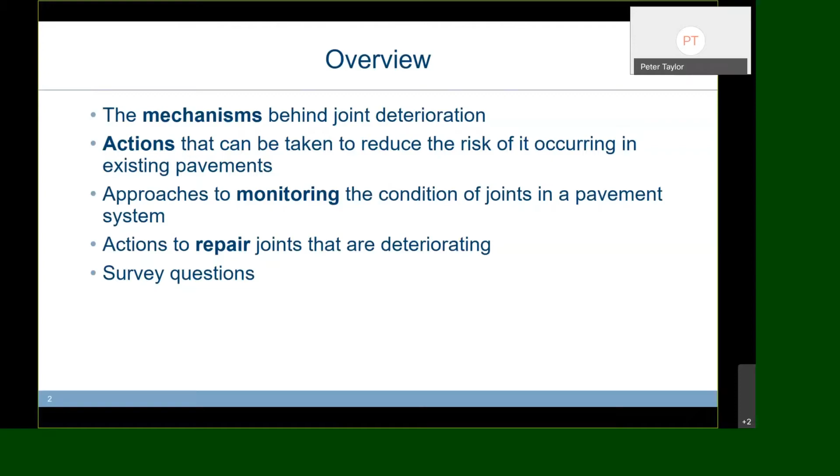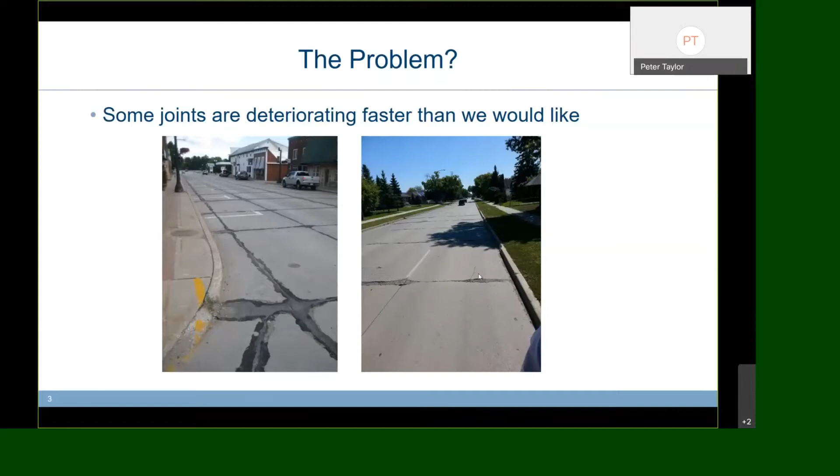So what are we talking about? Joint deterioration. These two photographs are very typical. It doesn't happen everywhere, but particularly in small towns where the whole town looks like this, city engineers tend to get a little bit grumpy. The center of the slab is beautiful, it's in pristine condition, but the joints themselves are starting to show signs of distress. And depending on how you repair them on the fly, they can start to look pretty ugly pretty quickly. We tend to see it more in local streets, but occasionally we do see it in interstates and expressways, but this is more unusual.

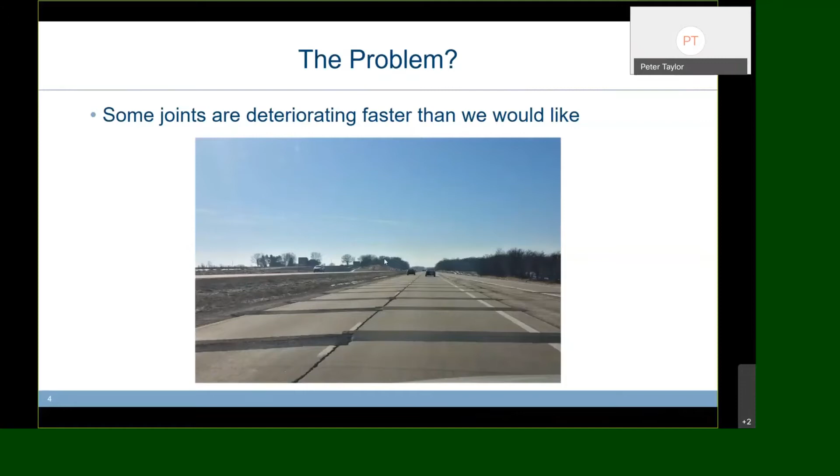How bad does it get? Well, it basically depends how long you leave it. It often starts out as the shadowing here, so a discoloration a few inches away from the saw cut, but if you leave it long enough, you can end up in fairly severe distress. And I'm pretty sure that speed limits in this section of the city are severely lowered. Maybe it's an effective way of doing traffic calming, but I'm not sure that most engineers would agree with that.

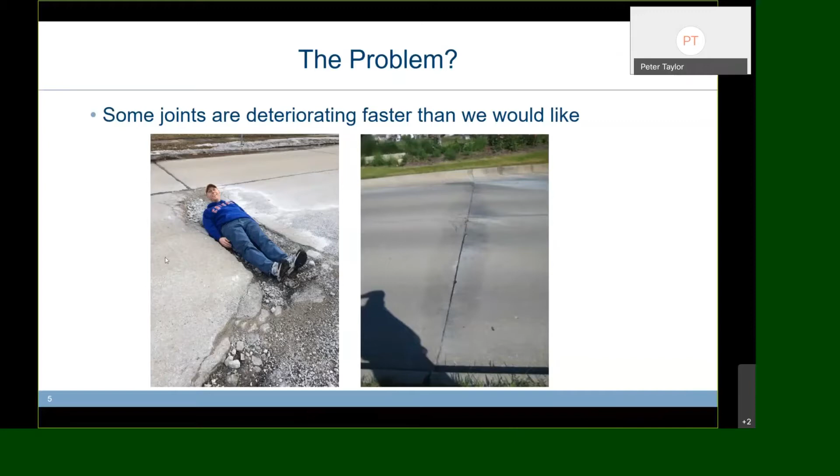It doesn't always look the same. Sometimes it's in the form of raveling. In the photograph on the right here, a crack has formed about 1 inch off the original saw cut, the material's been lost, and it's been repaired. 1 inch away, it's happened again. And in this case, it's happening a third time. You can see a crack starting to form, a third layer of distress. So it's stepping its way out from the original sawn surface. It keeps on going even after you repair it. And that may play into the conversation about how do we repair it, and we'll address that later on.

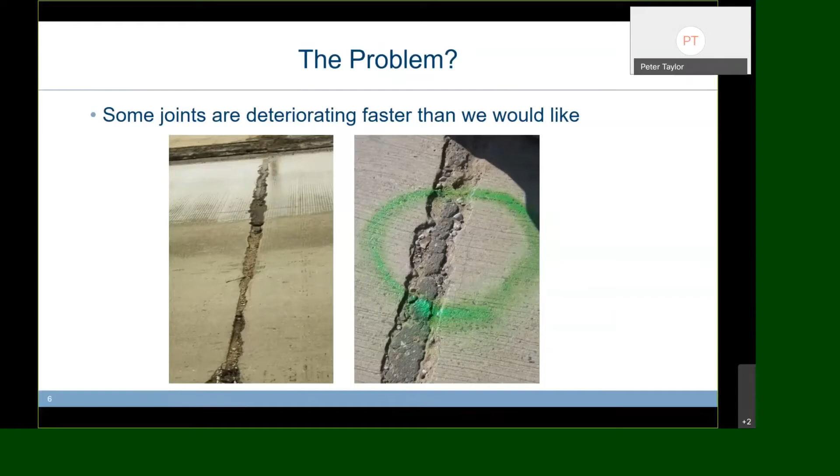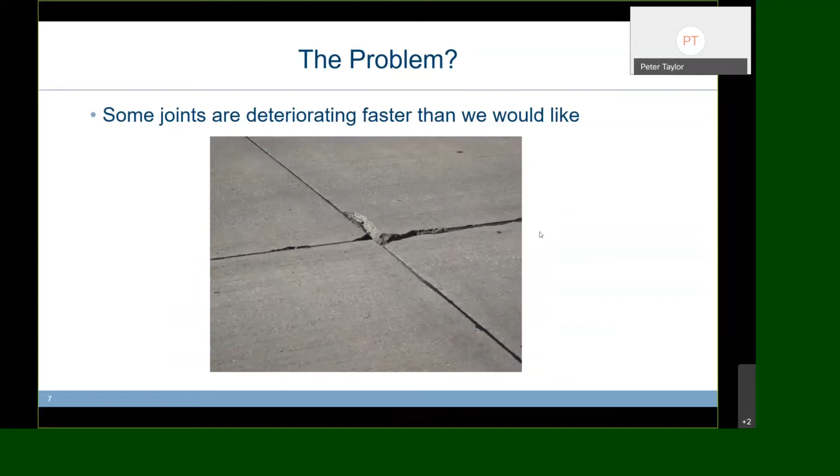One of the more challenging scenarios has been this one, where this is all obviously the same concrete, slip formed all at the same time, and one corner is in real trouble, two corners are showing a little distress, and the fourth corner is sitting there high and dry, proud, happy, no distress whatsoever. And that was always a challenge for us to begin to understand how that sort of thing could happen.

So in summary, the things that we most often see: it's more prevalent in local streets than in mainline slip-form paving. It's not everywhere, but wherever it does happen, it does seem to be pretty significant. And there are frequent examples of it happening here and then not a little further down the road, even the next panel.

Now, the photograph is of a city street in the Midwest. It's about a 2-mile length from where I took this photograph to the end of the road that you can see. The first mile was placed in June. They closed the whole road down and replaced it all. Then when that section was complete, they reopened that to traffic, closed the second mile down, and repeated the exercise. Same contractor, same crew, same materials, same source of concrete, same traffic, same environment.

The section we're standing on is not pretty. The second mile is pristine. Very confusing. Now, the only real difference between these two sections is they were placed about a month apart in time.

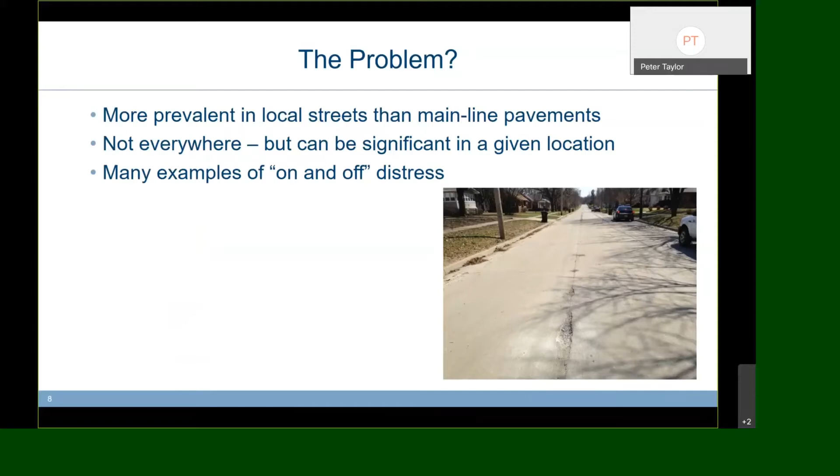We spent a lot of time looking at this. We had a pool fund running. We had some of the biggest and brightest brains working with us, including Larry Sutter and Jason Weiss. Larry and I spent a lot of time traveling all over places where we were trying to pick up clues. We were trying to find locations where it happened and didn't happen so that we could pull cores from them and see if we can observe the differences between them.

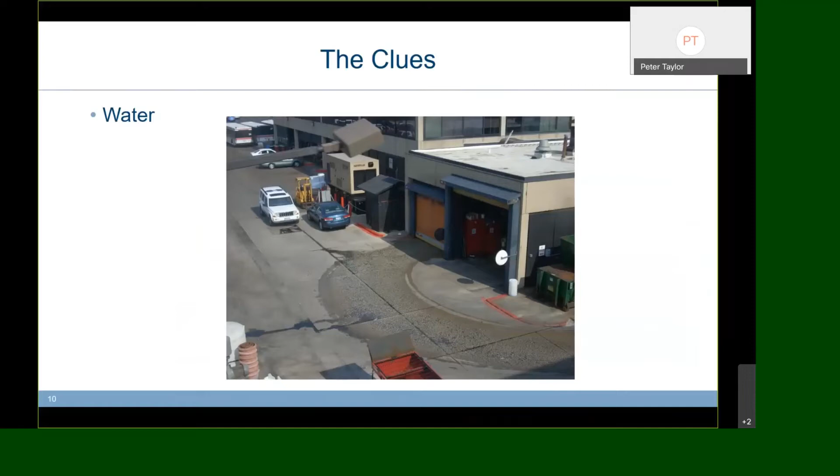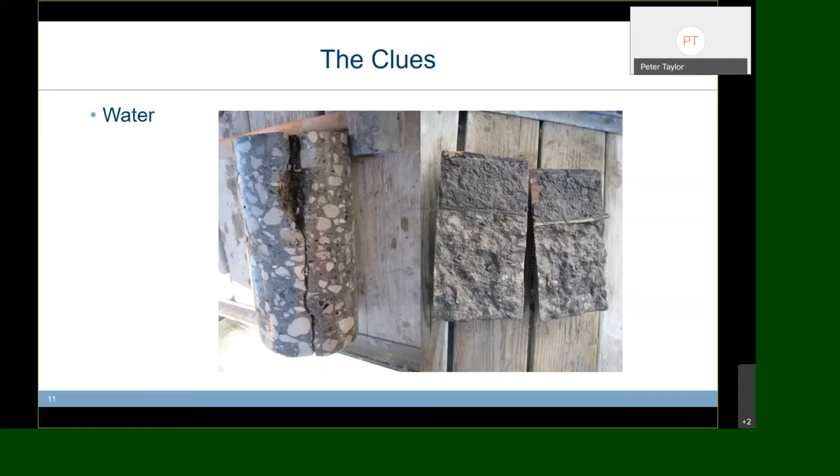And underneath this section, it was clay. So once the water penetrated through the crack, it had nowhere to go because it was saturated. We were at the water table. So the water got trapped in the kerf. And then we got freezing and thawing cycles. We got chemical attack happening inside the kerf here. And you can see the little fingers of damage. It looks like thin flakes, almost like fingernails, layers and layers and layers of them. And that soon became a fairly typical observation.

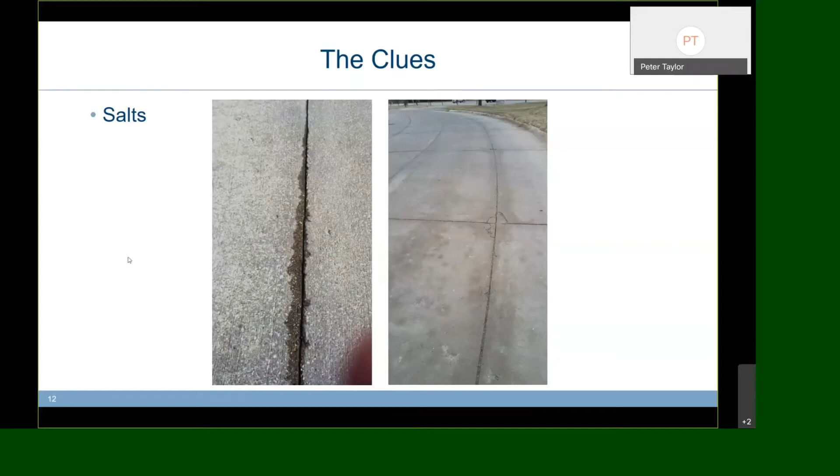In this case, on the photo on the right, this is right outside my office. And again, you can see the center of the slab is really pretty and dry, but around the joints, it's still wet several days after the last snow event. So again, the de-icing salts are holding the water in place, increasing saturation.

The other issue, and this is one I do want to highlight as we move forward, is that typically we were seeing that it happens in pavements that are about 10 years old. And indeed, some older pavements that were really happy all of a sudden started to deteriorate relatively recently. And again, this started to be part of the clues that we used to solve this puzzle.

I'm going to come back to this idea of systems that have been in place for a while, in that I'm still getting questions. People say to me, you did this work years ago, you gave us all these recommendations, and damage is still happening. Why? And often as not, when we do investigate it, it turns out the pavements that are starting to show distress now were built before people started implementing the recommendations that we were making several years ago.

So I guess the point that I really want to make is that there's still a fairly significant amount of concrete pavement out there that may still show signs of distress because it was built before we were able to make rigorous recommendations on how to prevent it. So we can expect this problem to keep showing up for a few more years. And that sort of plays into the discussion we're going to have at the end on how do we fix it when it happens.

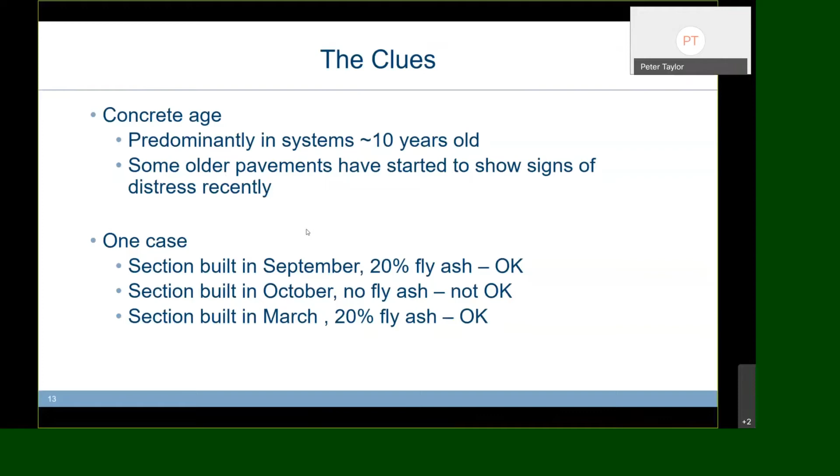In the Iowa case, we think what happened here is that the transverse joints were early entry saws, about 1 inch deep. The longitudinal saw cuts were T/3. So any material or water that got into the transverse joints drained into the longitudinal joint and then got trapped. The crew doing this repair work were telling me that any water that got into the system while they were sawing didn't drain away.

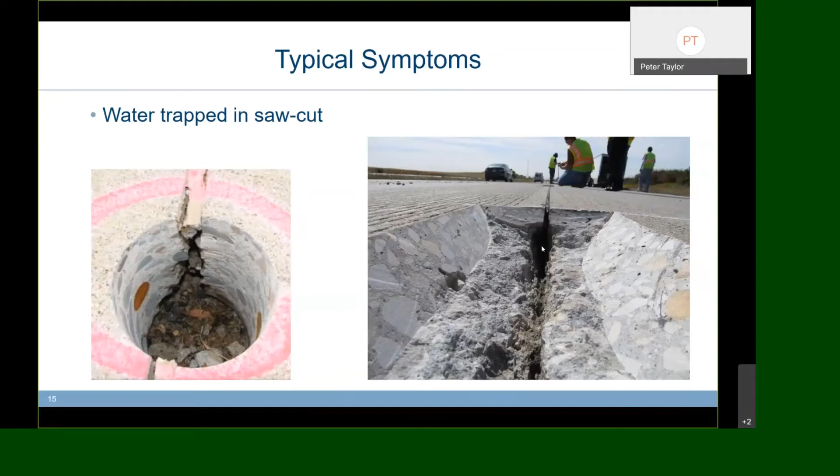These were tight joints. They had tie bars across them. Water couldn't get out, so it was trapped inside here and causing or accelerating the distress.

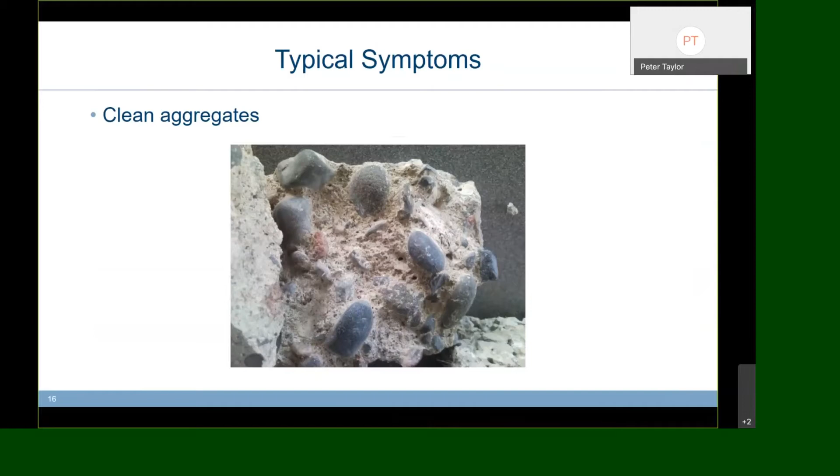And I've seen this in many locations around the Midwest where, if you have enough raveling, what we're seeing is that there's loose pebbles lying around in the troughs where the damage has been happening.

So one face where the blade is not actually impacting it, it's clean and it's dry and there's far less impact. It would be the left-hand side. On the back face where the blade is fighting the concrete on its way out, you're leaving behind the bruising, and that bruising or micro cracking is a place where water can collect, nasty chemicals can stay, and that's where the damage is happening. And that made a lot of sense when this was explained to me.

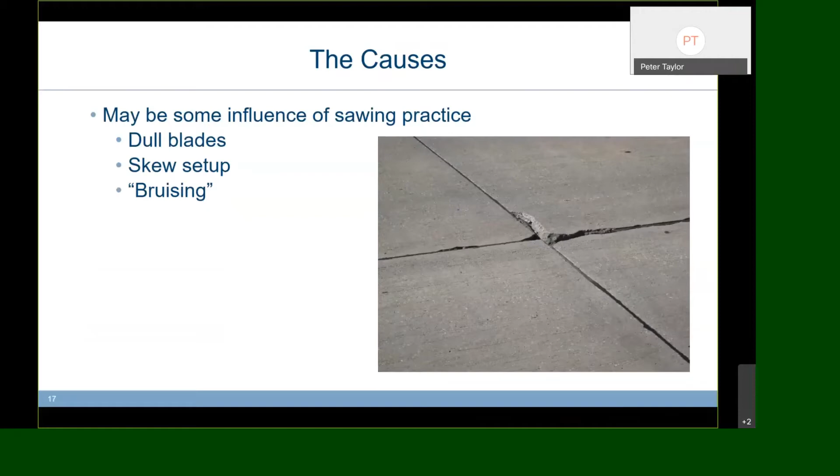So, saturated freeze-thaw is when you have a system that's completely full of water, including the air bubbles. When it freezes, the water expands, the water's got nowhere to go except to jack the system open. What saturation do you need? Jason Weiss has indicated anything above about 85% saturation, again, let me emphasize, including the air bubbles, you will start to show signs of distress. And the air bubbles significantly slow how fast that system gets saturated. And that's why they protect us from freeze-thaw distress. So we need a good air void system in our concrete to protect it.

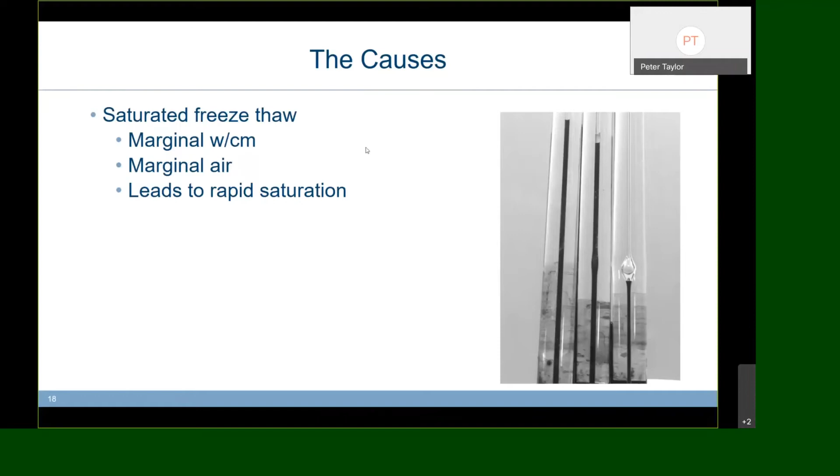What these air bubbles do actually do is that because they're now filled with a fibrous material, their protection against capillary suction is compromised. An empty air bubble is difficult to fill with water. An air bubble full of ettringite is extremely easy to fill with water. And so your saturation rates will go through the roof. And there are data out there, I've got data from a German paper, showing that in a system like this, the rate of saturation is far higher. So your rate of distress will also be far higher.

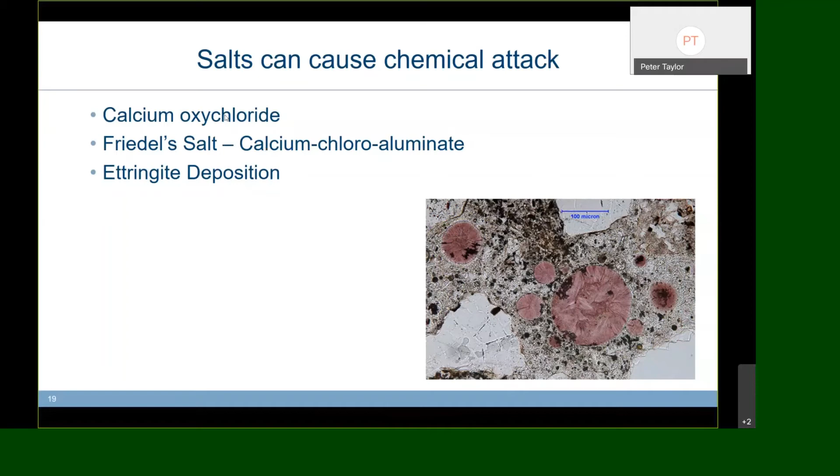The other salt, Friedel's salt, calcium chloroaluminate, can deposit out in the voids. But the big and nasty one that causes the bulk of the distress is this beast we call calcium oxychloride. This is an interesting compound, mainly because it's not stable at very low temperatures and very high temperatures. It forms and expands at around about 30, 40, 50 degrees Fahrenheit. So this is not a cold weather issue. In fact, the biggest issue comes in spring.

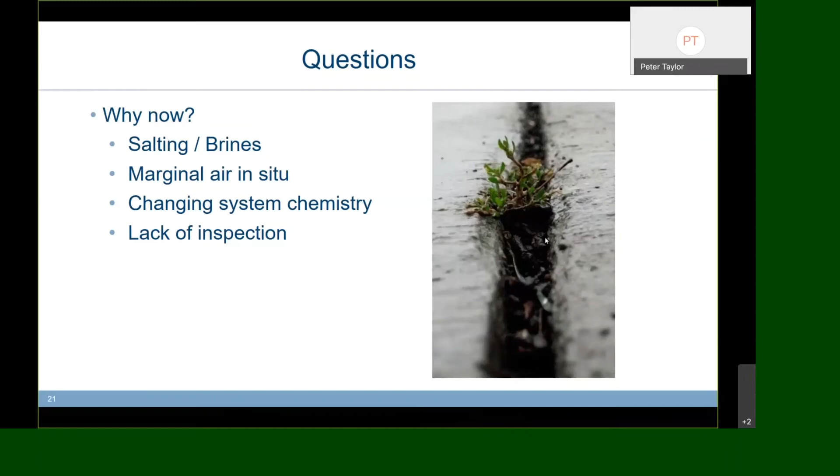The other part, I would encourage agencies, particularly local agencies, be aware of what's in your salt. Whenever I stand up and do this talk, I'll ask them, what salt do you use? And many of them say the same as the DOT, and most state DOTs do not allow anything but sodium chloride. Then I start to quiz them about the products that they're buying. Oh yeah, we do buy that. Oh yeah, we do get that stuff.

So again, my message to agencies is be aware of what you're buying, and make sure that you're aware of it all the way down the food chain. I've had it more than once. I speak to the chief maintenance engineer. Nope, we don't buy anything but sodium chloride. So then I go and speak to the foreman at the de-icing plant, and he says, nope, nothing but sodium chloride. Then you go and talk to the truck driver, and he says, yeah, right.

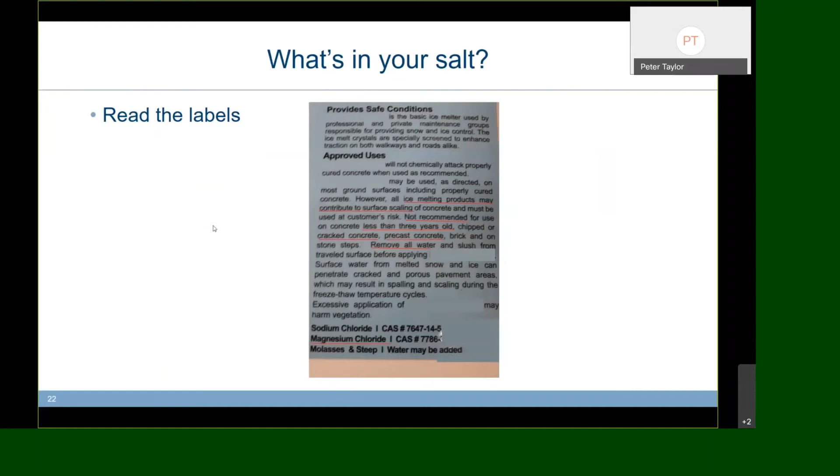There's all sorts of interesting stuff in the back of my truck. So again, what's in your salt is a fairly significant part of our process.

Why does it happen in some joints and not others? I think part of it is batch variability, particularly in hand-placed concrete, because we all know the first thing that happens when a ready-mix truck arrives on a construction site, the foreman, without even looking up, says, add 10 gallons. And you immediately change your water-cement ratio. It may have been delivered at a 0.42. It's now at a 0.45. And that is enough of a cliff edge to take us over the edge.

I've got more than one core set taken from good and bad places where the water-cement ratio is 0.42 in the good, 0.45 in the bad. Drainage, and I'll talk about drainage in a couple of slides' time.

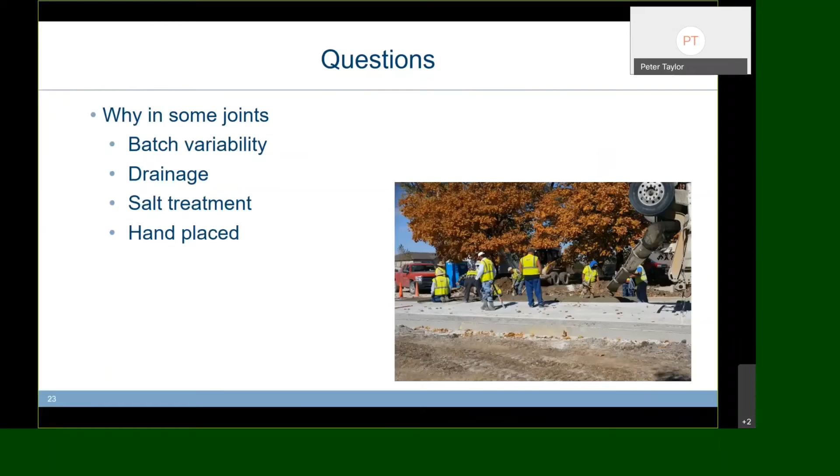Salt treatment. I often see more distress in intersections than I do in the middle of a city block. Why? Because in the intersection, it's getting treated twice, by the north-south treatment and the east-west treatment. And in fact, rumor has it that the drivers will often open up the taps a little bit at the intersections. Why? Because of safety. Crashes happen at the intersections. We've got to get the ice out of those intersections faster. And so they get higher salt dosages. So, variability in our construction practices and our treatment practices can cause the variability that we're seeing between adjacent sections.

So we have to work hard at preventing saturation, making sure our drainage details are right. We have to work hard at getting low permeability concrete, which means the right amount of the right supplementary cementing materials with a low water-cement ratio and a good air void system. We have to make sure that all of these belts and braces are in place every time.

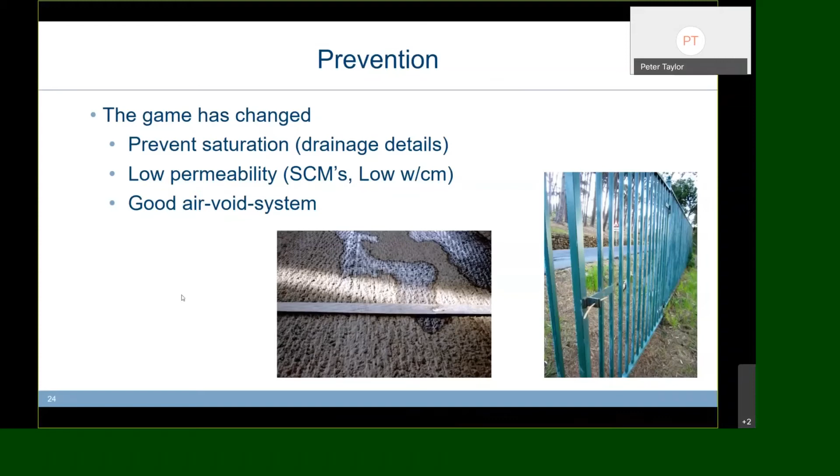The photograph on the left, I believe Minnesota started to play with this idea of a geotextile underneath the joints to help drain any water that gets through the joint out of the system and daylight it and get it away. And so we prevent that distress in the curb that we've seen in so many of the photographs so far. The other part to think about is, where did the water come from?

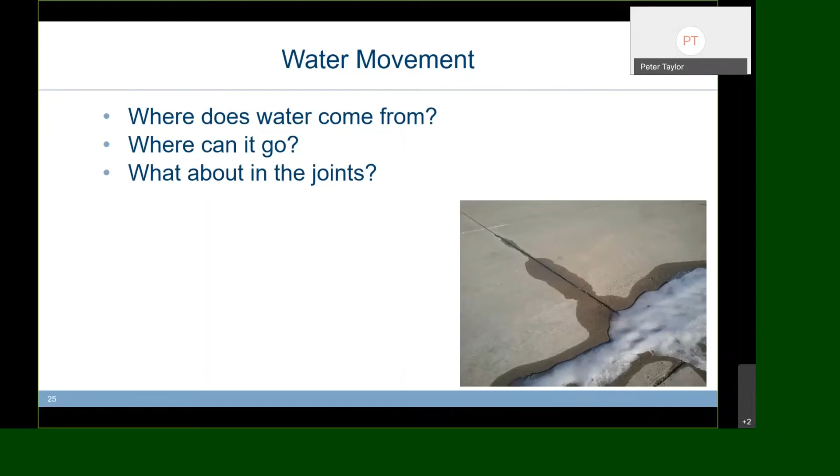Where can it go? If it gets through a joint and into a clay layer, it doesn't help us. In fact, I've got photographs taken out of parking lots where the water table is above the top surface of the concrete, with signs of the water traveling up through the joints and flowing away down the surface. Those pavements are in trouble. What about what's in the joints? So I think I got some other photographs to illustrate these. Where can the water go?

We actually have a little toy that can measure the permeability of the base underneath the concrete when we pull a core. And this was one of the examples where we had fairly significant joint deterioration. We measured the permeability of the base material. It was very low. The water was not getting away. So if your joint seal fails, water gets past it and it can't go anywhere, you're doomed.

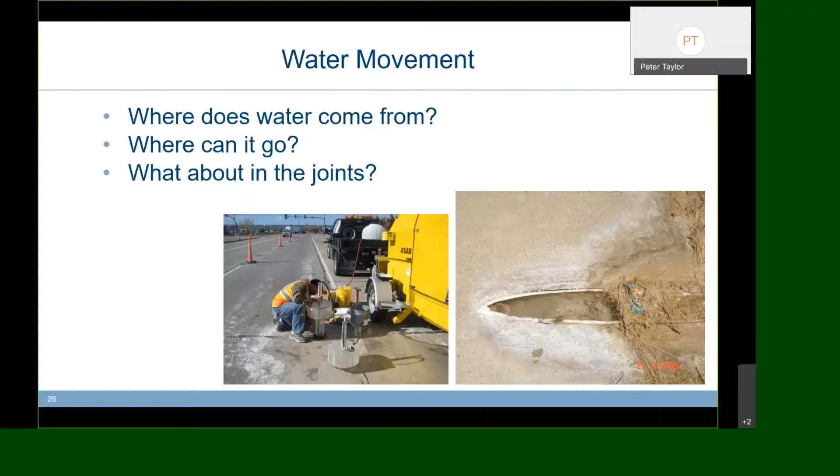The other part of it is, if you have edge drains or drainage systems, if they're full of plants, growth, algae, animal droppings, nests, it looks like a beehive in this photograph, of course, it's not going to drain. And so the system's going to get wet. We're going to go through the freeze-thaw distress. All right. The third one, what about inside the joints? Well, you've seen this photograph before.

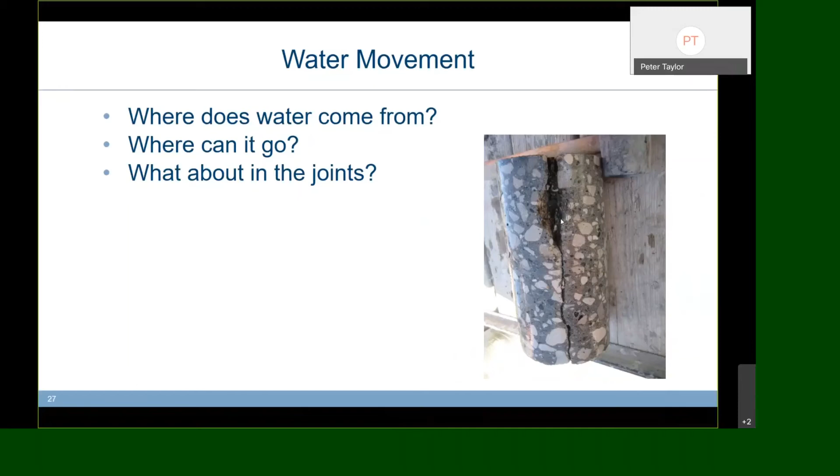If the water can't get away, it's trapped inside this kerf. This is where the issue is going to be. And so one of our recommendations is, forget about the backer rod, fill the whole thing up with sealant. It's not so much sealant as filler.

And these photographs fairly clearly indicate where you have a large space for water to collect and do its trouble, we have quite a lot of trouble. On the other hand, where it's been filled, there's less water available. And so the rate of distress is significantly lower. This is a policy that Iowa DOT has adopted. They're not putting backer rods in, they're just filling the whole thing up, and seem to be reasonably happy with it so far.

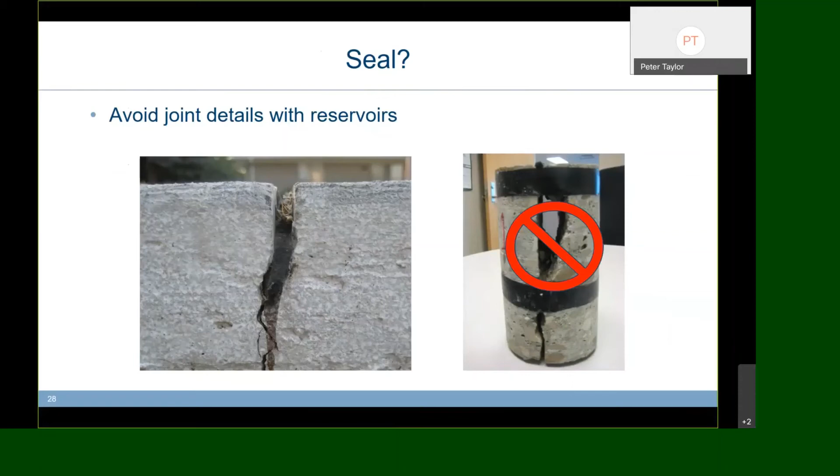Photograph taken from some cores that Maria Masten from Minnesota DOT pulled, I can't remember, it was 160 odd cores from around the state to look at, does the low water cement ratio system pay off? And one of the things that came out as a clue as they were looking at all of these cores is that where there's been significant cracking and expansion and the seal has failed, there is trouble. Where the seal has stayed intact, the concrete's in good shape.

So again, supporting this idea, if you're going to have a seal, make sure you maintain it. It's all very well to put a seal down at the beginning of construction, but in 5 to 10 years' time, you likely have to go back and repair it. If you don't, you may be then starting down this route of trouble.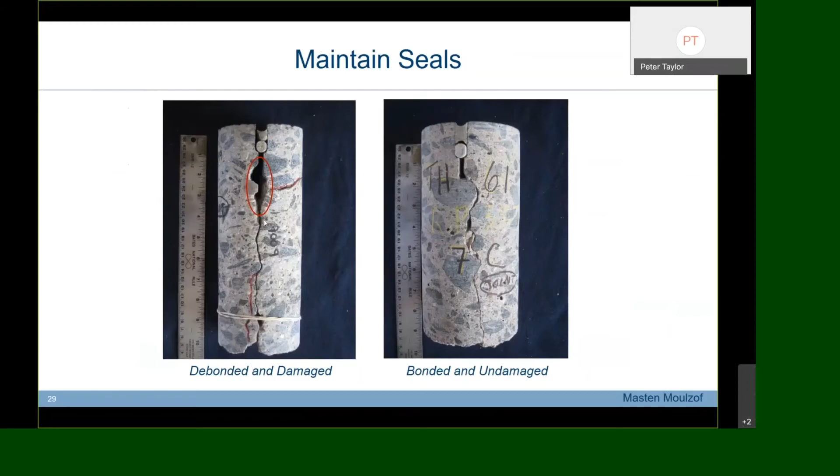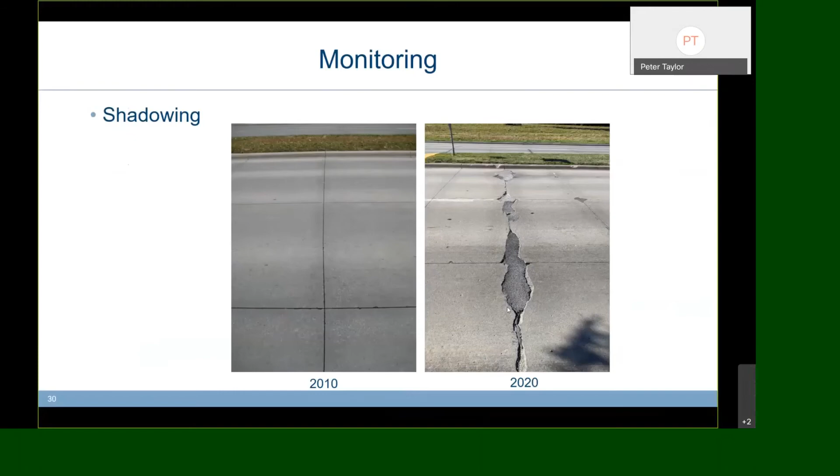So shadowing is a first early indicator. We think that the cause of the shadowing is very early, subtle microcracking that holds water. It shows up more after a rain event because the water is trapped in those microcracks. But eventually it does start to show this sort of distress.

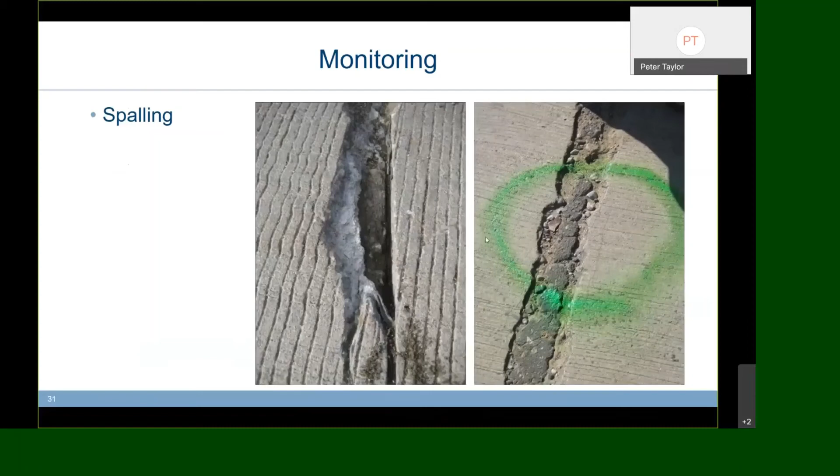All right. You also see spalling. You've seen the photo on the right before. I've already talked about how it steps its way up. What's intriguing is that if you break off one of these little pieces, it's solid, it's sound. So the crack is jumping and then progressing upwards. It seems to be only to the depth of the saw cut. So again, spalling is a fairly loud clue.

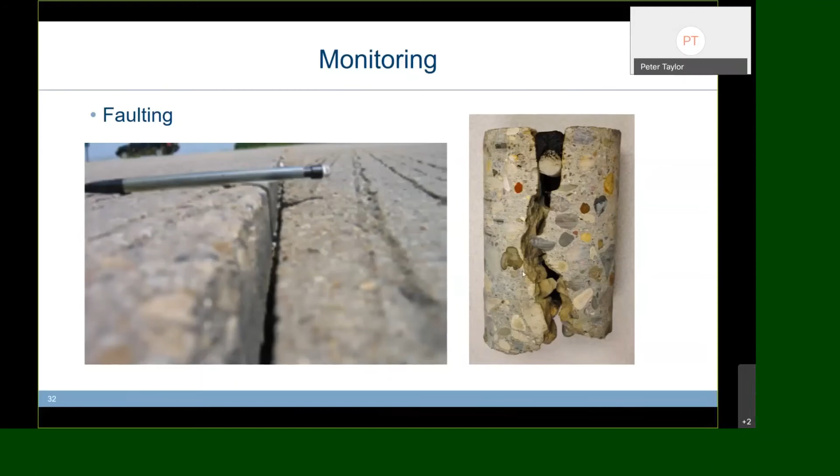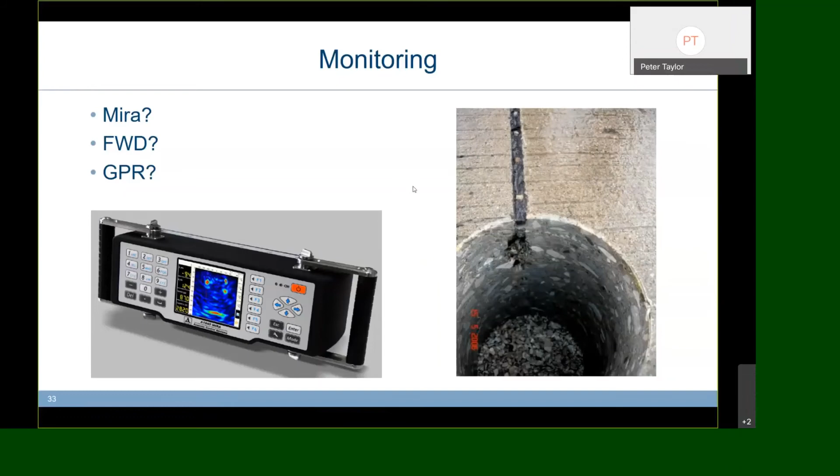But there are tools out there, particularly with the FWD, to help us understand load transfer, maybe a fairly effective way. Otherwise, just watch it. You're going to see it in the form of shadowing and spalling.

All right, I have got 10, 15 minutes left. And let's talk about, okay, so you've got a problem. What are we going to do about it? One of the quick and dirty solutions is to apply a penetrating sealant. There are a lot of different products out there. At this stage, I'm not sure that I know which ones work and which ones don't.

We're working with John Kevern out of University of Missouri, Kansas City, to develop a protocol to be able to assess the different range of products. There's all sorts of chemistries, different modes of action, and we're halfway through that research project right at the moment. So give us another year, and we'll be able to give you some guidance on how to evaluate whether or not a given product is working.

Most of them are pretty cheap, and so I don't have too much heartburn saying, yeah, go ahead and spray a product on. It'll buy you some time. How much? I'm not sure, but we've done a few field trials. In Iowa, several cities cooperated with us. We've sprayed these products on several different sections. Haven't been back to look at them for a couple of years and need to. Certainly a couple of them did buy us at least a couple of years. And that's always a good thing. At least gives you an opportunity to start saving up for other more significant repair approaches.

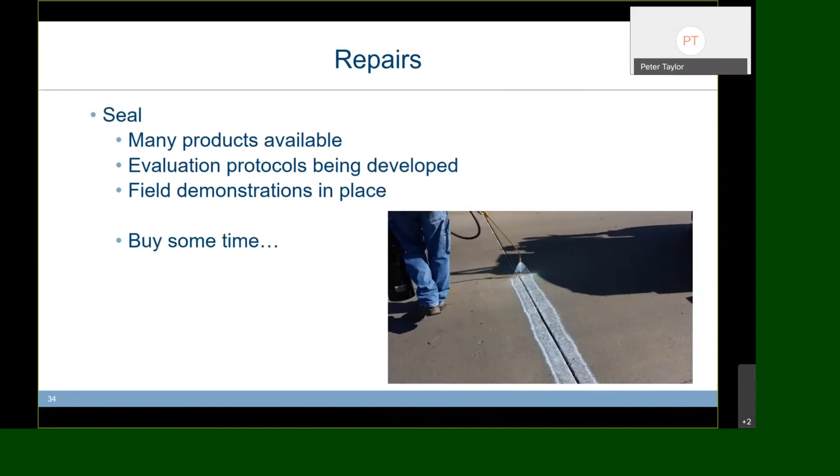The next step is to consider partial depth repairs. And again, Minnesota led the way in expertise. The guidance documents that we have produced were based on stuff that we learned from Minnesota. So you guys know what you're doing. I don't need to talk about it a whole hell of a lot. But again, partial depths only work if you can stay above the steel. The moment the damage goes through the full depth of the distress, partials are not going to be particularly effective.

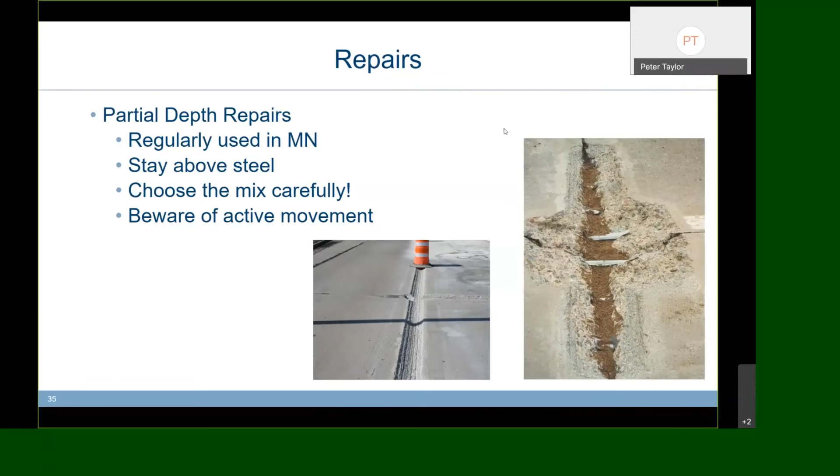The other trick with partials is choose your repair patch mixture carefully, because it's all very well to have a wonderful patch, but if it only lasts 2 years, the traveling public tends to get pretty grumpy pretty quickly. And once again, I think the Minnesota DOT has a system that they like and seems to be working for them. And I'd refer you to the DOT for guidance on what their tried and true mixture is.

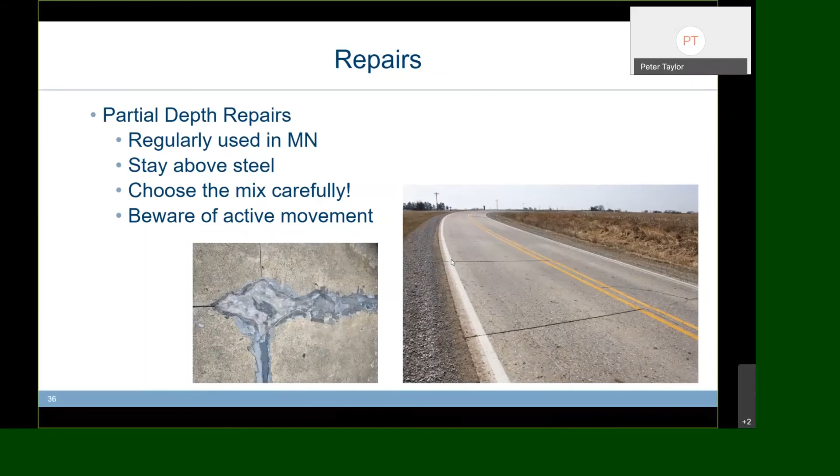The other one is, again, if you try and do a partial depth on a system that's faulted and moving pretty badly, it's just going to fail. The crack is going to go through the partial depth unless you put a debonding layer in. Make sure that it can move with the way that the slabs are moving later on. Otherwise, you're just re-inviting issues. So attention to detail, think like engineers, be aware of all that's going on inside your pavement. Band-aids don't help an awful lot on a system that's moving.

All right, if the depth of damage is all the way through or at least past the steel, or you have a loss of load transfer, then we have to think about full depth repairs. And again, Minnesota is well versed. I think I took this photo in Minnesota, or one very much like it. And again, there is a lot of guidance and documentation out there on how to do this effectively, but the basic idea is rip out the whole panel, cut it off, drill in and replace dowels to provide load transfer, make sure that your base layer is at least smooth, and put in a new surface.

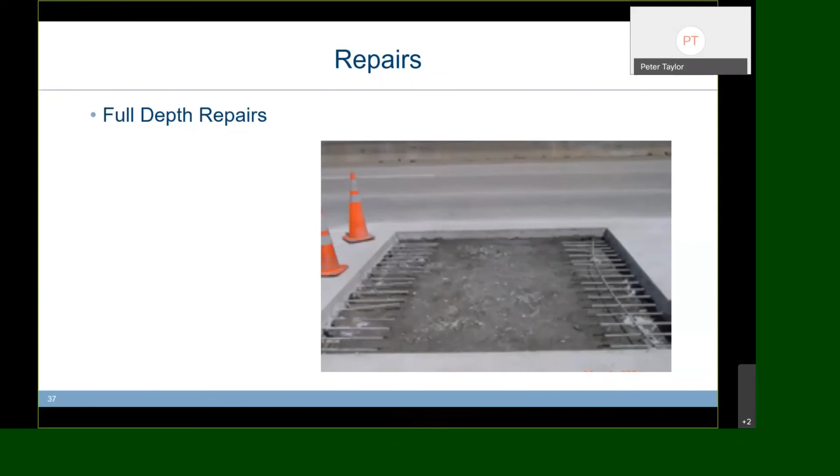The one art with this is choosing when do you give up on patching and when you go to a complete replacement, because if you're patching every joint down a 1 mile section, the economics may not play out. So again, look at that one pretty carefully. If it's just a few joints, this is a very effective way of getting your ride quality back. But if every joint is shot, you may want to look at it a little carefully. If you're replacing 80% of the system, the economics probably won't work.

The other approach is to look at overlays, particularly with unbonded overlays, is that, again, you can separate the new layer from the old layer. So again, if it's moving, if there's quite a lot of distress, you can just fill the holes, put a separation layer in the form of geotextile or asphalt over it, and put a new layer of concrete over the top. This works really well if you don't have any elevation issues.

And again, the other thing I would emphasize is that if you're putting in an overlay, make sure it's draining. I've seen mill and fill exercises fail because water gets past the joints into the debonding layer, whether it's asphalt or geotextile, and particularly with asphalt. If you have an asphalt debonding layer, water gets in there, it strips out, then you haven't got any support left, and then the whole thing fails.

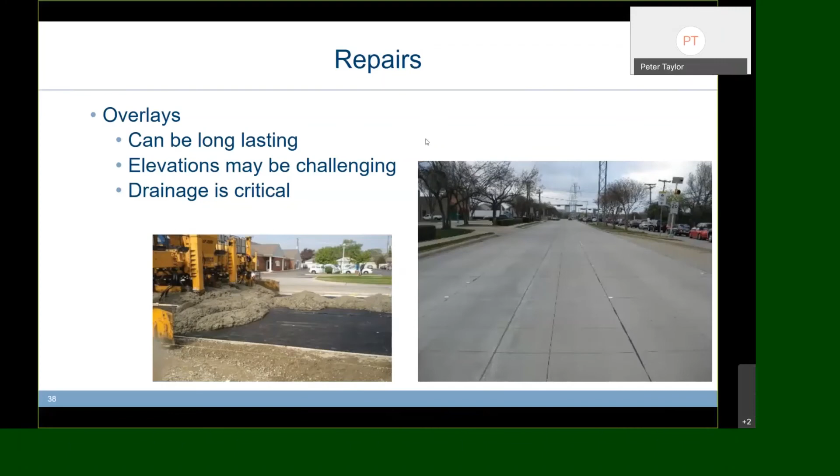Alternatively, if you put in a geotextile and don't get it into an edge drain that is open, or daylight it, once again, water trapped in that geotextile will start to eat away your concrete from below with freeze-thaw and oxychloride reactions. So again, drainage, drainage, drainage. It's a bit like the 3 rules of buying property. It's not location, it's drainage.